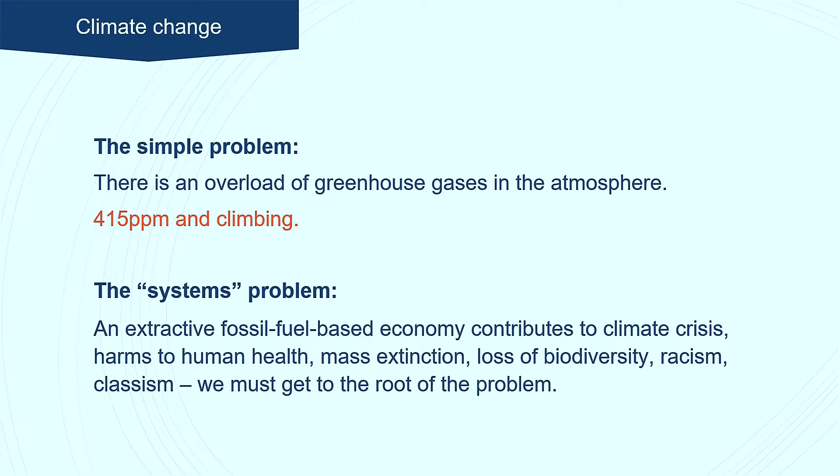An extractive fossil fuel economy is a root cause to a host of different sufferings across our planet, from human health impacts, mass extinction, biodiversity loss, racism and classism, and also a host of different social inequities. We need to get to the root of the problem to be able to develop the sustainable future that we're actually trying to create, and identifying that an imbalance in atmospheric chemistry is part of what's pushing us forward towards action.

So when we think about this on the buildings level, try to bring it to what everybody in this room is really good at, the simple solution is that the carbon emissions from the buildings that we all design, make, work on, renovate need to come down, and they need to come down sort of at the rate that the IPCC is saying is necessary to avoid the worst of climate change.

But the system solution means that the simplest steps we can take, and we're definitely going to show you a whole bunch of simple steps that are really impactful, but the simple steps like material substitutions aren't going to get us that whole way. They're not going to fix the system. They're going to be a small part of the solution, but we have to think about, as Ace was saying, how what we're doing in our sphere connects to all of these other spheres.

How does it connect to forestry? How does it connect to agriculture? How does it connect to affordable housing? All of these other issues. That becomes part of our domain if we're working on this. So just to start off, we're going to do a teeny bit of earth science and understand exactly what we're speaking about. Because like we were saying, in order to get to how our solutions are going to be effective, we have to understand the systemic problem.

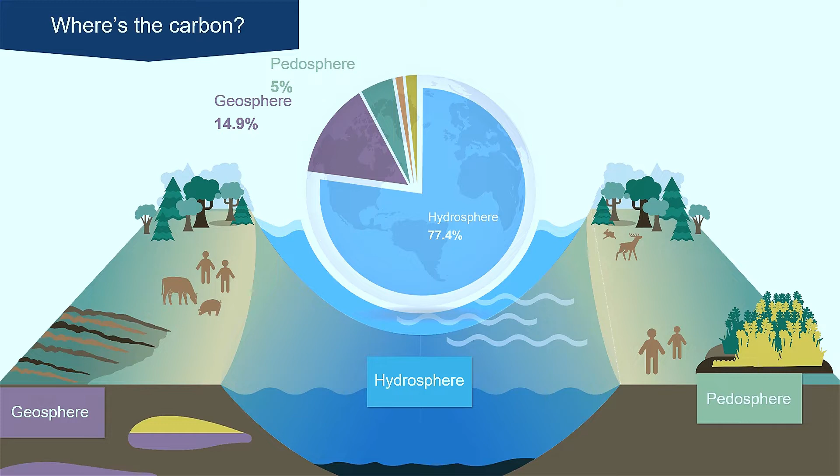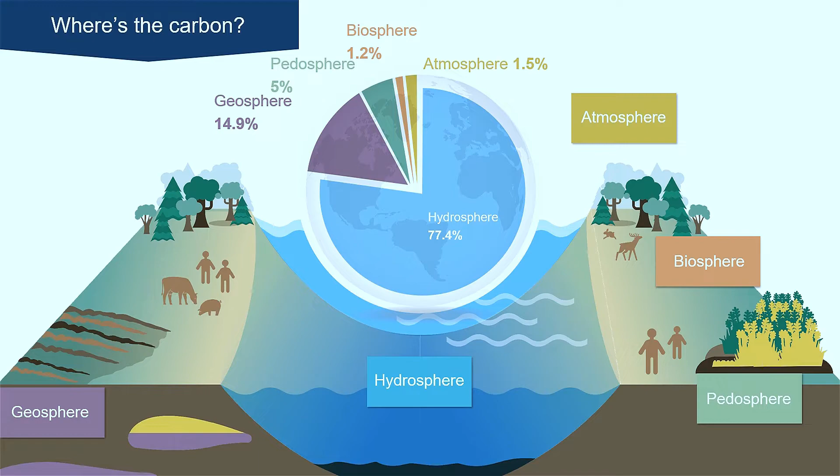And then we've got the geologic, down here, the geosphere, and that's rocks, basically, and the lithosphere, anything below the soil. And then we have the pedosphere on the right, that's the soil that represents the exchange between the rocks underneath and the atmosphere, the biosphere of living creatures, and the water as well. So the biosphere just popped up there. The percentages there are the percentages that exist globally of those spaces, and the carbon moves in and out in different forms between all of those.

So that's critical for us to understand, and really briefly, Jacob mentioned greenhouse gases, and the parts per million is an issue for climate change. The planet Venus, many people may be familiar. It's a planet in our solar system. Venus is a lot hotter than Mercury, which is one planet closer to the sun, and there is a key reason for that, and that is that Venus has an incredible concentration of carbon dioxide in its atmosphere, which creates a very intense greenhouse gas effect.

So because all of the carbon in that planetary system is in the atmosphere, it is very heated; you cannot exist on the surface of the planet. So our planet is habitable because we have a carbon balance. That is the key point that we should all understand. So the fact that the carbon system is out of balance, which is currently what is happening with climate change, is why we're in trouble and why we need to change course.

So you can see here we've got emissions due to human activity. I just want to be clear, carbon is always moving into the atmosphere. The fact that it's moving into the atmosphere is not a problem, but the fact that it's moving more than it should, out of balance, by human activity is the point that we need to pay attention to.

So we've got land use changes, which is a huge thing. It affects soil and allows carbon to move from soil storage into the atmosphere. And then we've got the pulling up of fossil carbon and fossil fuels and burning them. Those two activities that we've been doing are outbalancing the system, putting way too much carbon dioxide into the atmosphere, and all of the subsequent problems that we are seeing with that.

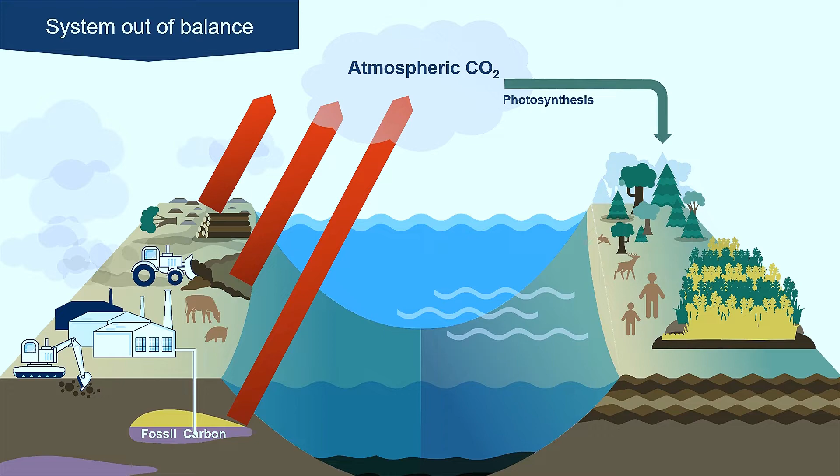So I guess actually I'm going to back up just one second. On the prior slide, here on the right, you can see the photosynthesis line coming down to the plants here. So this is super key. Everyone again, photosynthesis, hopefully grade school at some point. And as a reminder, what we're doing with photosynthesis, plants take sun energy, water, and atmospheric carbon, and they make glucose and oxygen, two things that we really want, food and oxygen.

So in that process, they are storing carbon into the bodies of the plants themselves. So you can see here the plant shoots represent about 30 to 50% of the carbon content that the plant stores. And the plant roots, which you can see beneath the soil, generate about 1 to 3 times that through an interaction with fungus in the soil and create soil storage carbon or soil organic matter, which is where carbon lives in the soil.

So this is critical for us to understand because this is a part of what ecologists and folks understand as the short carbon cycle. So there are 2 carbon cycles. One works with the lithosphere, I love saying that word, lithosphere, rocks in the geosphere, and that takes eons, 100 million years. The short carbon cycle is something we can affect directly, us in partnership with plants. And so that's what we're going to be talking about today.

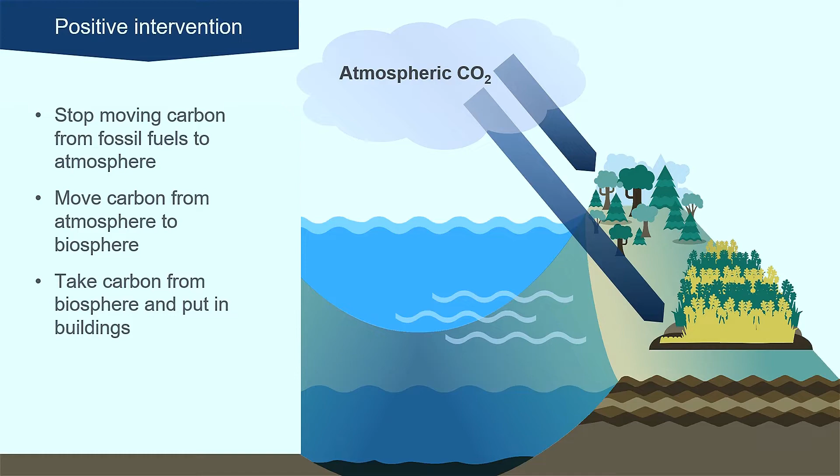And we have to move the carbon that is in the atmosphere back into the biosphere. So we are going to take atmospheric carbon with the use of plants, partner with them in respect, and put them into our buildings to create buildings as the 6th carbon sink. That is something that we as humans can do.

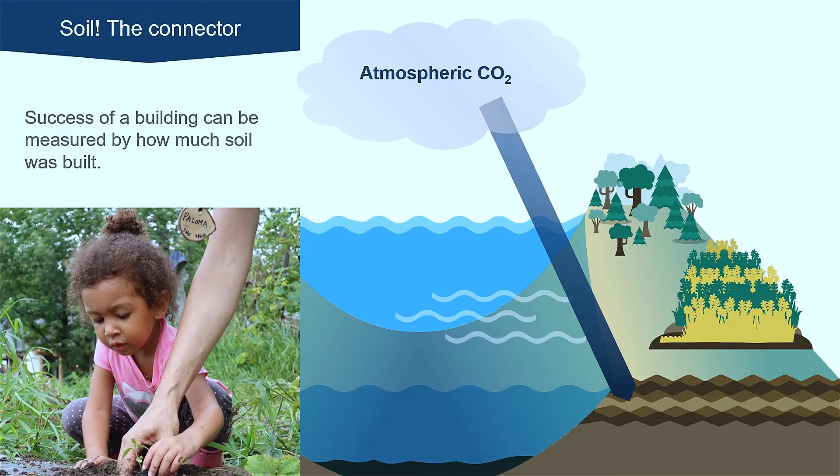So we're going to speak for a second about soil because it's actually really huge. Soil is a connector that, as I mentioned before, connects the geosphere with the biosphere. It's kind of the transition zone between those two things. So it is a mixture of inorganic and organic compounds that store quite a bit of carbon for us globally.

So the key piece that we need to understand is that when we are using carbon storing materials, plant-based materials in our buildings, if we do not pay attention to the way in which that is done, we will actually create more problems. So for us, we'd like to charge everyone here that the success of a building can be measured by how much soil was built in the process of those resources that were used for the building being created.

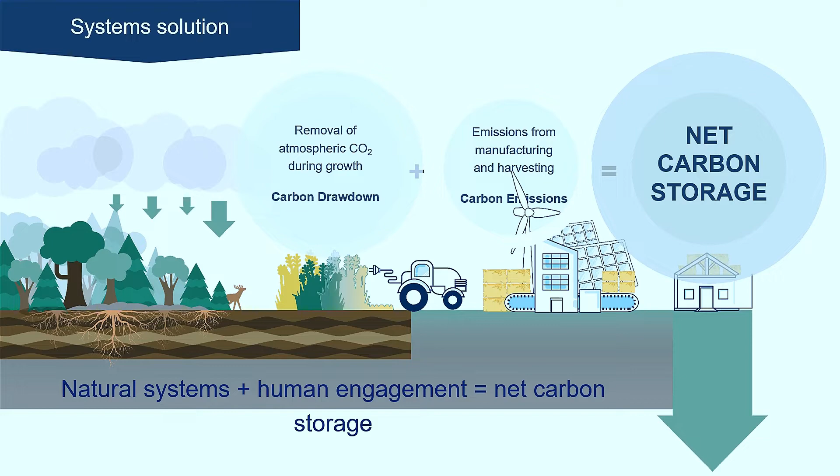We've got solar panels providing energy to that factory, and can anybody see the plug popping out the back of that tractor? So we're looking at changing on multiple scales the way that we practice harvesting materials from the earth that we depend on, building buildings. If we pay attention to how that's done at every level, we magnify, we catapult, we radically multiply the benefits of our action.

So the last thing that I want to say on this is I would encourage everyone to get this book if you have not yet read it. It's Farming While Black by Leah Penniman. She is a farmer in New York State and runs a project called Soul Fire Farm. And Leah has a really great quote that I think is worth us considering.

She says, "Organic matter in soils on the plains plummeted by 50% in just one generation of white settler colonialism. I realized that all of our efforts to heal the soil entailed the restoration of organic matter and was, in effect, a decolonization of the soil. We were inviting our non-human relations back onto the land and back into relationship with us."

So for us, what this really points to is when we think about what does colonize mean? Colonize means that a force, an action, a group of people says, I'm going to go and seize this piece of land or this group of people or this resource, and I'm going to do whatever I want with it, regardless of what was there before, what it is, what its nature is, any of it.

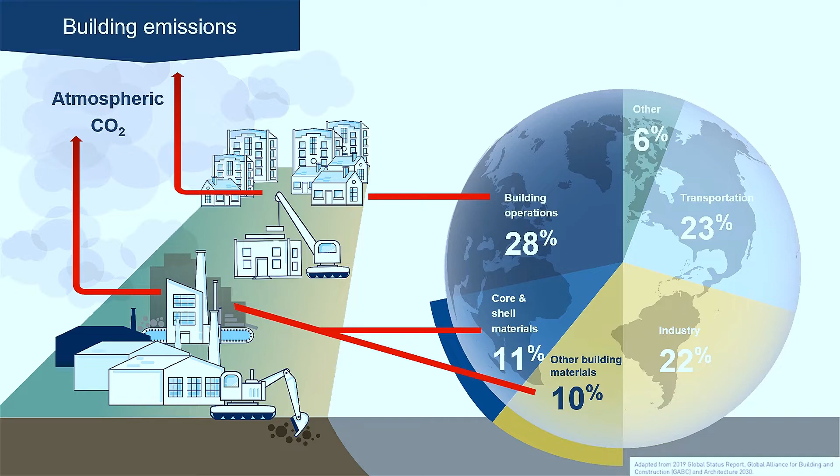But we also see there's an additional 21% of global emissions as a result of creating all the materials that it takes to make these buildings happen in the first place. And where we are right now with the chemical imbalance in the atmosphere and the scale of impact of our industry is that we cannot ignore those two pie wedges. That 21% has to be part of the place of intervention that we take as an industry to minimize our impact. So let's look at the life cycle of a building here.

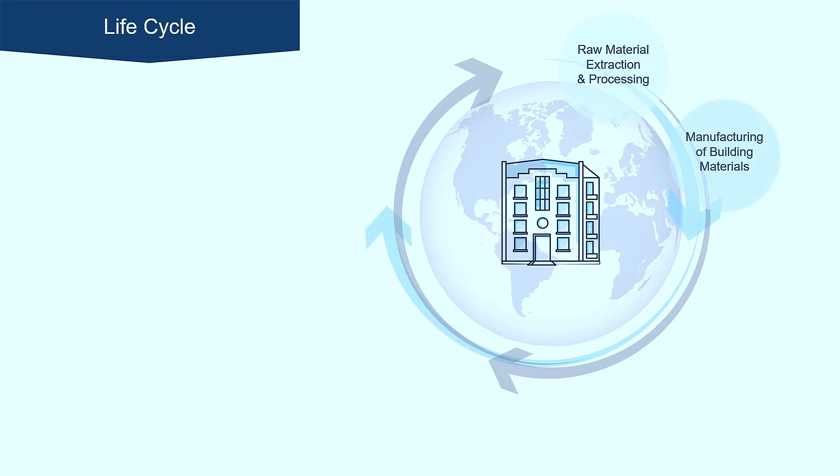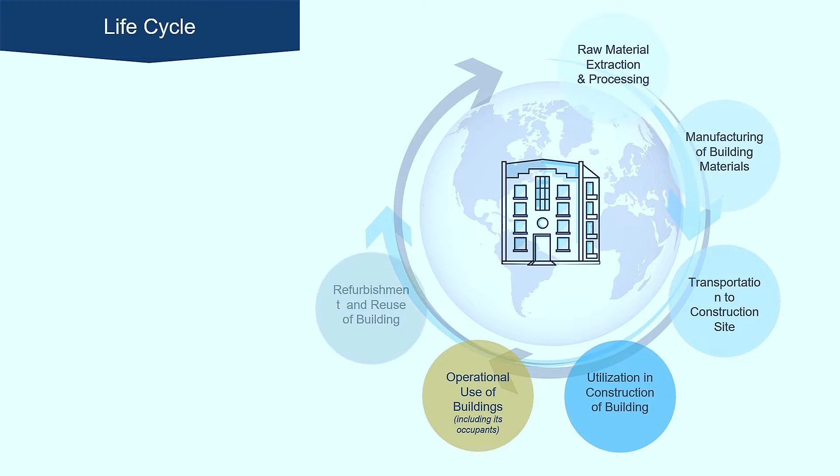We're starting with raw material extraction and processing, goes through manufacturing. All those materials get onto a site. They get constructed in the whole process of construction of creating that building. And then there's the operational phase. That's the one we've been paying a whole lot of attention to. There's maintenance and repair, the demolition of the building, and then recycling or disposal of all those materials.

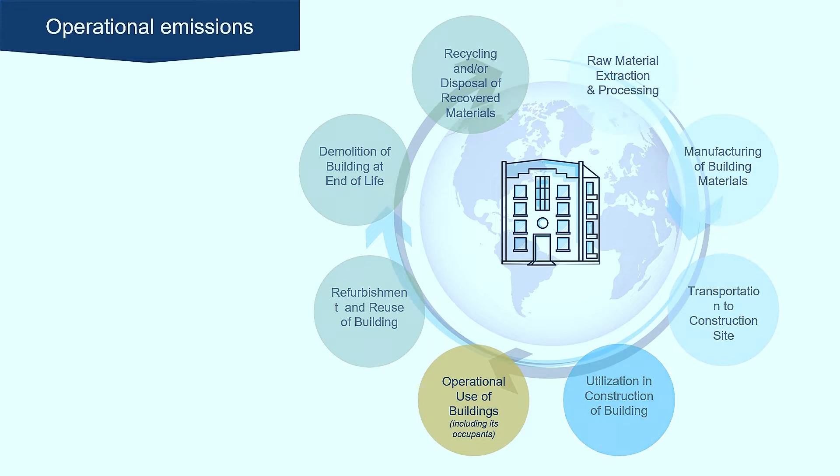So there's an entire life cycle our buildings go through, and there are emissions that occur at every single stage of that cycle. So the majority of our focus as an industry up until this point has been on the operational use. And that is critical because it is the biggest wedge of the pie.

So fundamental that we have been paying attention to that, and give tremendous credit to everyone in this room and this entire community of Efficiency Vermont specifically, and the broader movement of better building energy efficiency practitioners. We can take a tremendous amount of pride in the efforts that we have done up to this point in reducing this largest and most critical impact category. And so we need to keep that effort strong.

In no part of our message in broadening our scope and our focus on other points of impact do we in any way mean to diminish the impact of that work or the critical nature to amplify and increase the amount of operational emissions that we are reducing in our practice. And also, we need to broaden our view beyond simply the operational phase of the whole building life cycle.

And so we've been speaking for a very long time around energy, and when we're referring to a lot of our goals and targets and language around the efforts, it's around energy efficiency and energy reduction. But the atmosphere is less interested in how much energy we're using and more interested in the carbon emissions as a result of that energy production. So to get a really good understanding of what the true climate impact is of our building's operational energy use is to not just look at the energy consumption, but the associated carbon emissions.

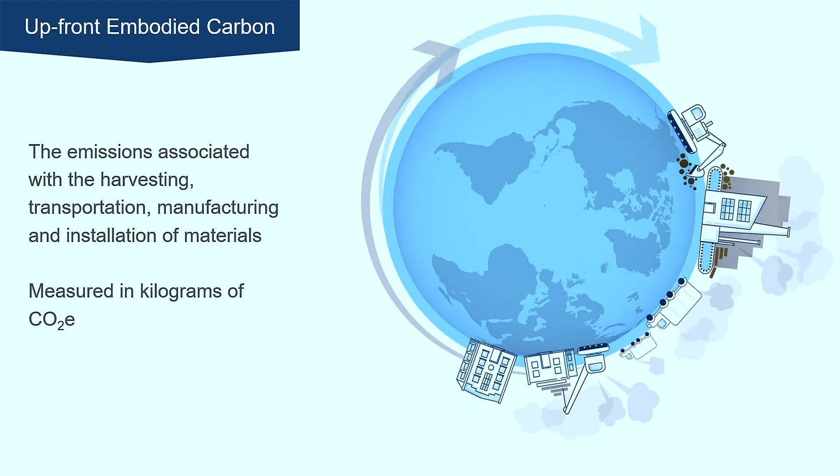When we talk about upfront emissions, we're looking at that category of the life cycle that's happening before the building is even in operation, before day one of occupation. And that whole bank of emissions in those first parts of the cycle are the upfront emissions. And so we can see there's a tremendous amount of impact that comes in each one of those phases. And just to make sure our definitions are clear, that upfront embodied carbon is what we're talking about when we're looking at the material impacts of our buildings.

And the reason we're focusing so specifically on that part of the life cycle is because we have very, very little time to reduce the emissions of our industry. We have multiple generations ahead of us, if we play our cards right and make the changes that we need to, and those end-of-life cycle emissions also count. But the point of intervention is right now. And so the first part of that life cycle is the most critical place of intervention when we consider the short, very narrow window of time we have to make meaningful reductions.

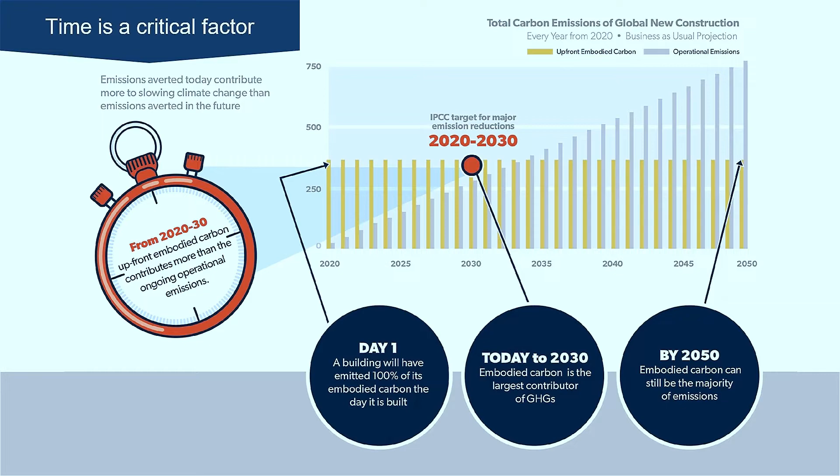So looking at this graph here, just to explain what's happening here. There we go. So day zero, we have a whole whack of carbon emissions that has been invested into the creation of that building. And then every year, we have an incremental addition of operational carbon emissions. And by a certain point, the carbon emissions that come from the operational use of the building outpace the initial investment of emissions that we used in the production of those materials and the construction of that building. But we are starting into the lifespan of that building with an incredible carbon debt if we're not paying attention to the impact of those materials.

So there is not a way to net zero energy our way out of that problem when we have already invested decades worth of operational emissions just in the construction of the building. So if we're truly trying to get to a goal of net zero carbon by 2050, we cannot do that through energy efficiency measures alone. They are critical. We have to keep that bar high, but we cannot ignore all those upfront emissions that we have invested into the building before the building is even occupied.

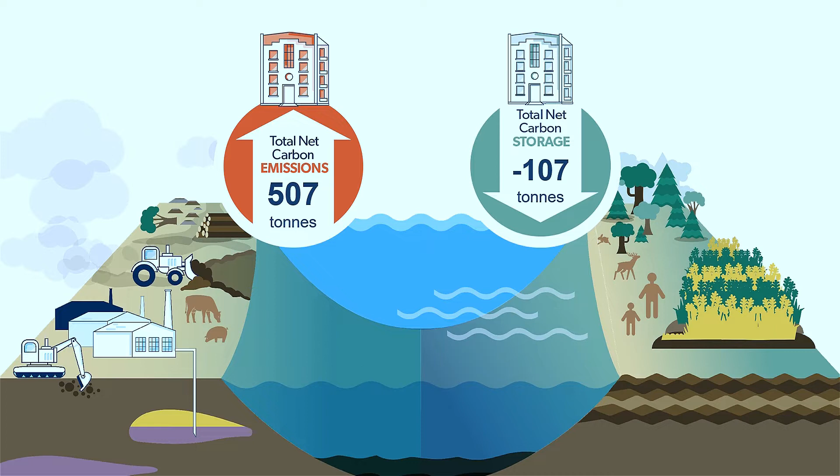And so linking that back into the context of the full global carbon cycle, we can see that the potential of our buildings in business as usual practices will continue this cycle of imbalance if we're not attending to the impacts of the materiality and the construction practices of our industry. But if we can intentionally intervene in that cycle and encourage carbon drawdown cycles that exist within our natural ecosystems, then we have the potential to reverse that impact.

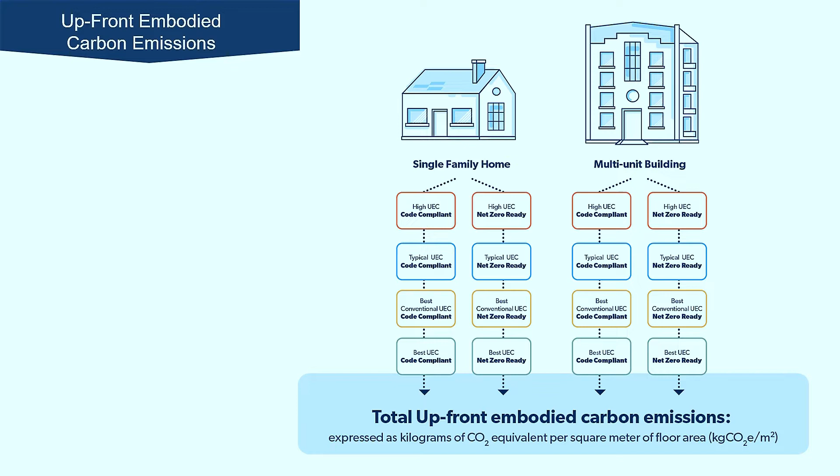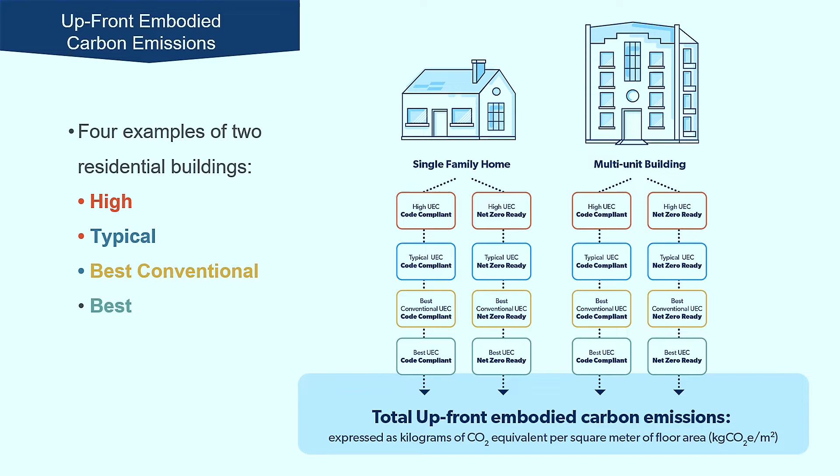Okay. This is the part of the talk that we called last night the nerdy graph slides. Nerdy graph part. Yeah. So this is where we'll dig into what does this look like at the building level. And so this is based on a study I did over the last couple of years where I took a sample single-family home and a sample multi-unit building, and I found data on all the materials you could possibly use to build that building, and I clumped those materials into ones that had really high upfront embodied carbon, mid-range, or I called typical, the absolute best things that you could go get off the shelf today, and then the absolute best practice that we could find anywhere, and tallied up what the emissions were for those buildings in all those scenarios.

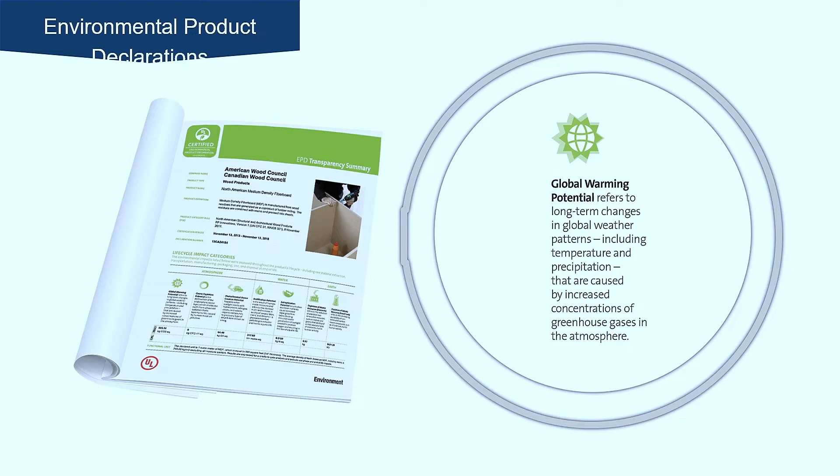All of this data comes from these documents called environmental product declarations. This is something that more and more companies are doing. Couldn't have done this study 5 years ago because there weren't enough of these around, but now there's enough of them that it gives us a really good baseline. I could look at examples of these for all the materials that we would normally use. And so all of these are third-party verified studies that companies commission, and one of the data points that comes out of them is the global warming potential of the materials, and that's what we've used in this study.

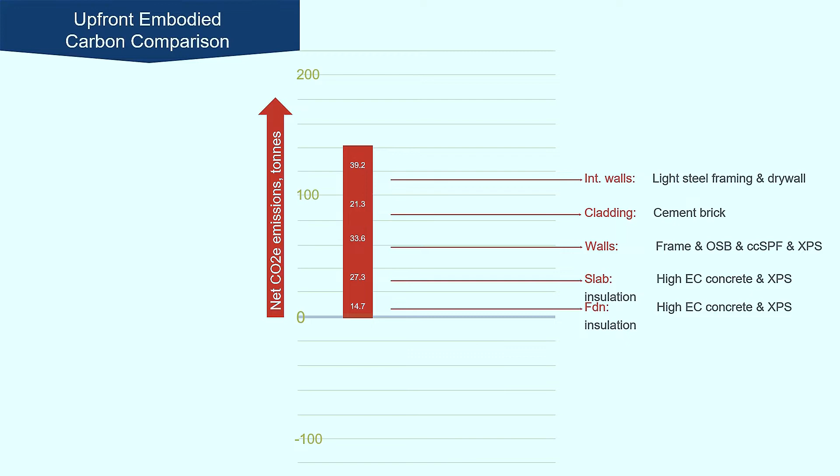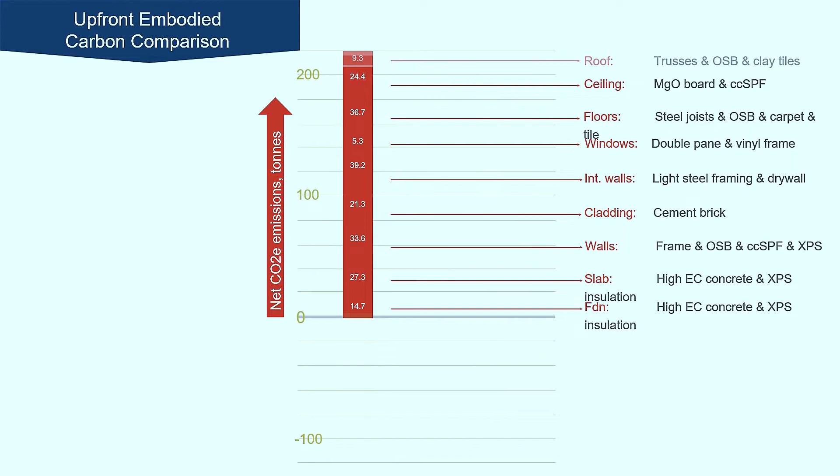So what I'm going to do, and I'm not going to linger and talk about each of the assemblies and materials, you can read them as they go up, but what I want to do is give you the sense that I basically figured out how much of each of these materials was in this building, and I multiplied it by the global warming potential factor and added it all up. This is the larger building, the multi-unit building, so it's 10,000 square feet, 4-story, 8-unit apartment building. And basically it's built in this version to, I'm from Ontario, so to the Ontario Building Code minimum standards for energy efficiency.

So if I chose materials from the higher end of the spectrum, that building has over 200 tonnes of emissions associated just with making the building in the first place. So that's the carbon debt that Jacob was talking about. So whether I make this building super energy efficient or net zero, no matter what I do, this building has a 200 plus ton carbon debt that it's caused on the planet before anybody moves in.

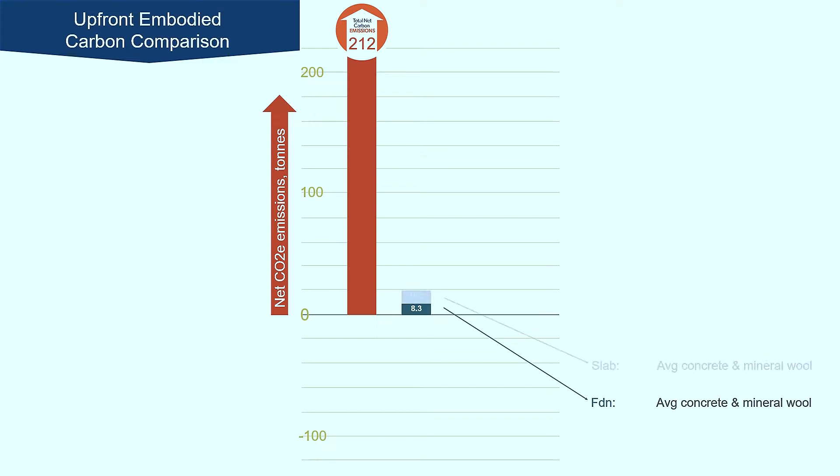So then I subbed out that first round of materials for more typical materials. These are all pretty much straight substitutions. Both of these examples, you will recognize all these materials. We all use them. So without taking any huge steps, without making any big change to the practice at all, that same building can now come down to 68 tons of upfront carbon emissions. Super big impact, super minimal effort or steps needed on our behalf to make that difference. And that's a huge step, to be able to affect that much change simply through some material substitution.

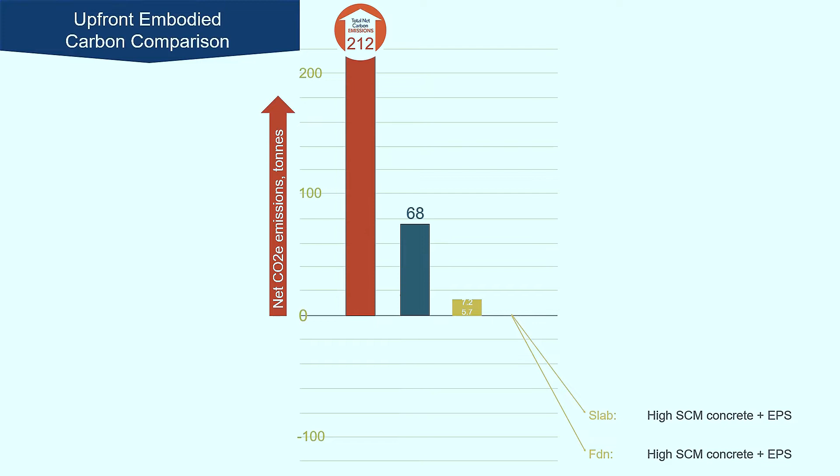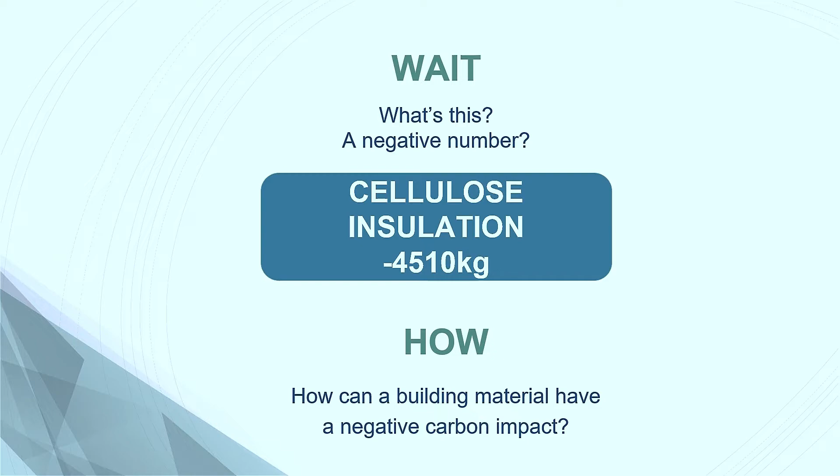So the next model I did, I thought, well, what if I really was being intentional about this, and I am a builder, so I care about this, and I want to do this with the things that I can go get locally that are code compliant. I don't want to veer off into alternatives or anything. What could I do? What would be best practice? And so this one starts to go up, and then all of a sudden I run into, in this whole study, my first negative number. And so now we're talking about the carbon storage, the carbon drawdown that we were first referring to in the opening of the presentation. And Ace will tell you what that's all about.

Awesome. Yeah, so as Chris said, I think you had a moment of just being like, wait, what? Did I do the math wrong? Why is there a minus here? Right. Yeah. So again, like we were talking about, as builders, and as a builder doing your own research, you were leveraging this plant-based storage as an insulation material to help the total impact of your building.

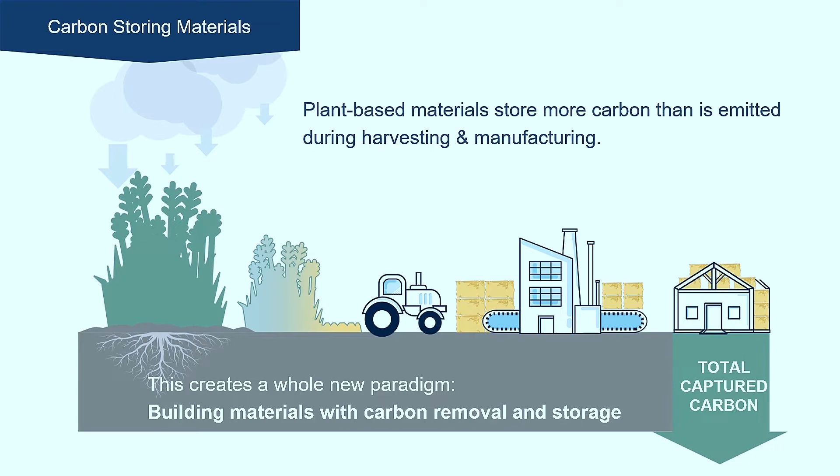Right, so then, like we were showing before, that little equation of natural systems plus our activity equaling captured carbon. So really this is kind of the nexus of what we want to explore with you today: creating this whole new paradigm of building materials that actually remove and then store that carbon in the building. So as long as those materials do not rot or burn, we're good. And I think most of us here have worked for a long time on how to not have our buildings rot. So hopefully we're good on that one.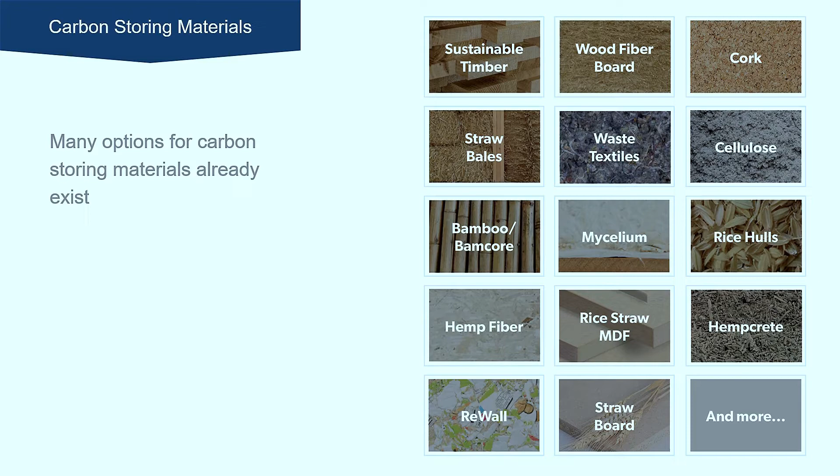Great. And so then, many options exist for this. I know it might seem like, come on, are you guys trying to sell us on some crazy technology that isn't yet accepted by code or isn't practical to achieve or buy? And the fact is that some of these are actually very achievable and accessible, as Chris was mentioning. Cellulose is a great example. I think many of us in this room have used cellulose in either dense pack or loose fill forms in multiple places in our assemblies.

And another very accessible one is wood, which can be complicated because, as we were talking about in the introduction, the way in which the wood is harvested is actually very critical to whether or not it has a good net storage at the end. So there are complications there, but sustainable timber is a really great resource for storage that we can all support. Especially here in Vermont, we have a lot of sustainably managed woodlots that many of our rural foresters and sawyers are managing, and that's something that our company takes a lot of advantage of, using local wood wherever we can.

And then wood fiberboard is another one that has really, in the last few years, catapulted in terms of visibility. So I recommend that everybody check that out. It can be a really good swap, one-for-one, for rigid foam in multiple locations in the building. So those are some that right now you could all take a look and find. Some of these other ones are more medium.

The three of us have had a long history in straw bale construction. So there are plenty of new innovations happening with straw bale that are really worth looking at. Our company built a panelized wall system out of straw bales for a project recently. That's something that's been happening in Europe a lot, and I can see North America really starting to get into it for solutions for multi-unit and single unit buildings. And then some of these are a bit more R&D, but I really encourage everyone to pay attention to these developments, because there's a lot of exciting innovation happening around carbon storing materials in buildings. So I think we're going to see a lot more as we move forward.

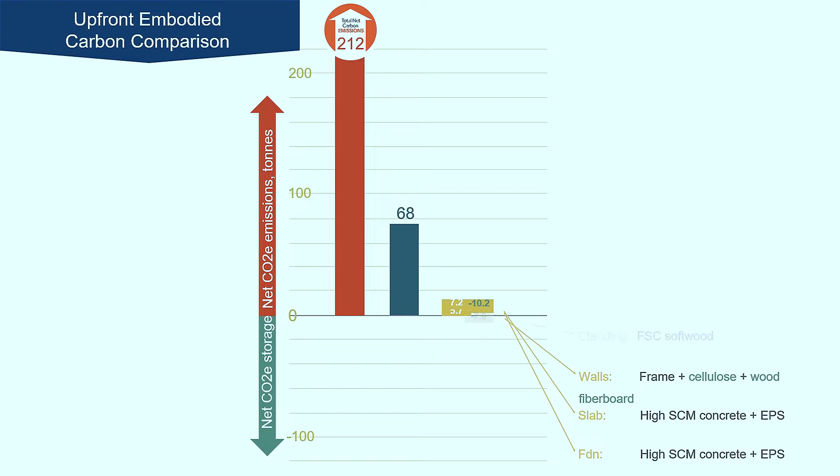Okay, so we'll continue the narrative of this yellow type building that has its first negative number. That's from the wall assembly that has dense packed cellulose as the cavity insulation and wood fiberboard as an exterior insulation. Now we've got some FSC certified cladding that drives the number down further. We've got some FSC wood on the interior walls. The windows drive it up a little bit. So you can see it's going to go up and down depending on the materials. But the amazing part is this building comes out to be a net storer of carbon.

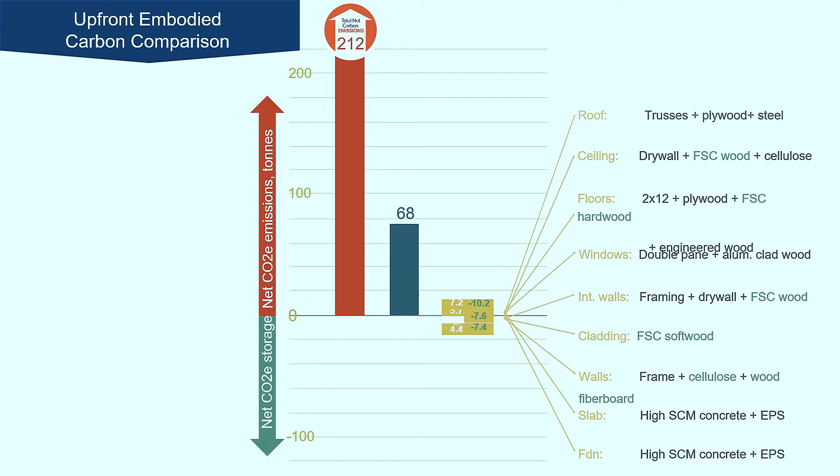So with very little in the way of deviating from our typical practices, from our norms, we can go from making a building that has a couple hundred tons of emissions associated with it to one that's actually below the zero line, that's actually starting in a place where it has stored more carbon than was emitted in making it.

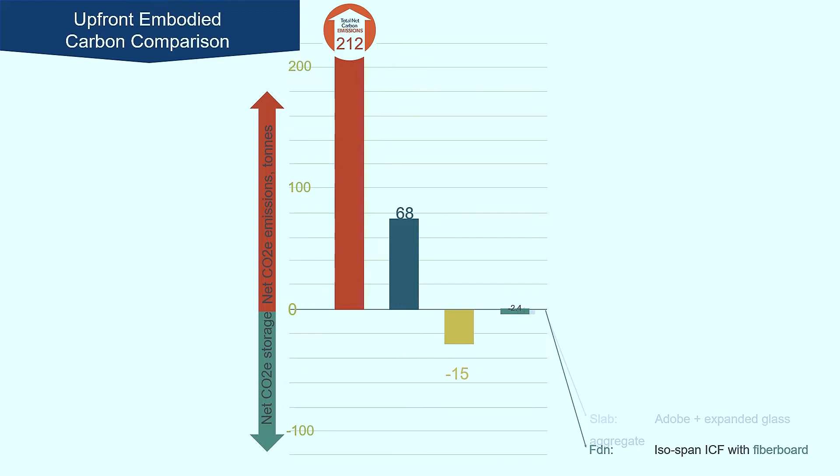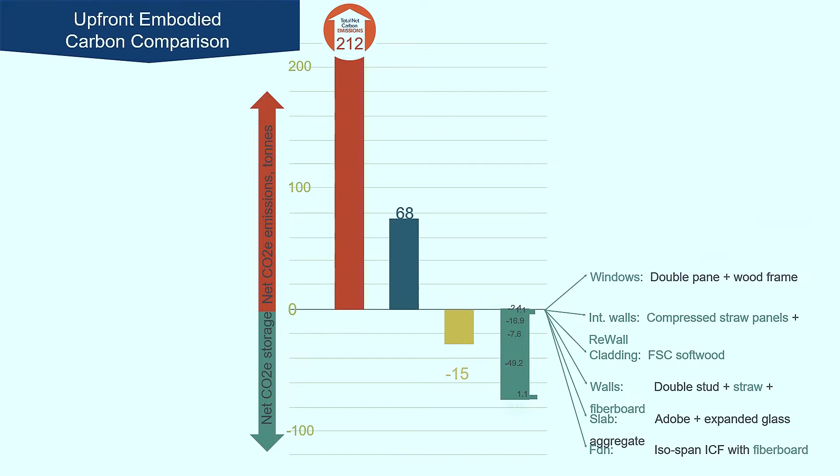And then the final one that I looked at was, well, what if we took the absolute best materials, and it doesn't matter if they're common practice, and it doesn't matter if I can get them at Home Depot, but they're out there and people use them, and they're things that we could feasibly use, and actually in our practice we do use. What if we use the best possible scenario? And you can see most of these numbers are going on the downward slope, and that same building can now store 117 tons of carbon up front.

So now we've almost flipped the paradigm of the first two buildings completely upside down, and we've now got a building that's storing a really quite vast amount of carbon from the get-go. So you're actually drawing down. That's the carbon drawdown we're talking about. That's a drawdown building where there's a significant amount of carbon came out of the atmosphere and is stored in the building.

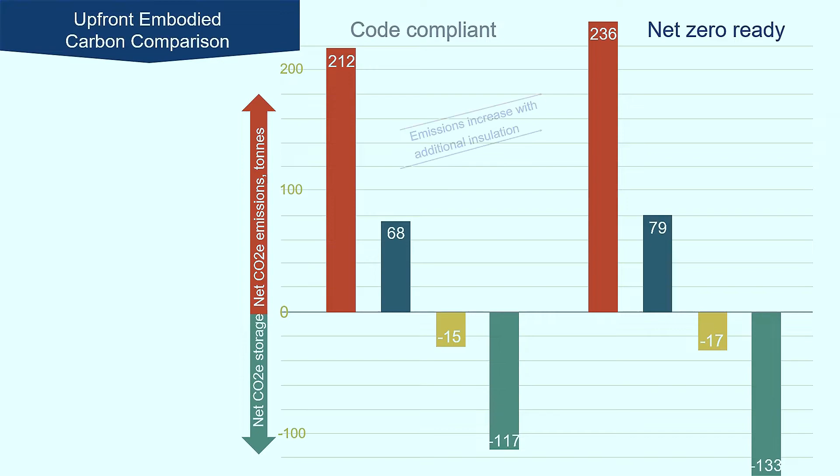So that's if I modeled that building to Ontario Code minimum standards. I also modeled it as though it met our upcoming 2030 net zero codes. And what's interesting here is that in increasing the energy efficiency with the first two models, the red and the blue typology, in order to get some energy efficiency and to try to make an impact on emissions on the operational side, we've actually driven the emissions up by adding insulation that has a carbon footprint. And the exact opposite happens with the other ones.

If you're using carbon storing insulation, by adding more insulation, you're adding more storage. You've kind of started with a win-win. So instead of making this carbon investment and hoping it pays off, you're just doing a better thing from the beginning and then continuing to do the better thing afterwards. So it's not that more insulation or more or less energy efficient is better or worse. It has a lot to do with what materials you use to get there.

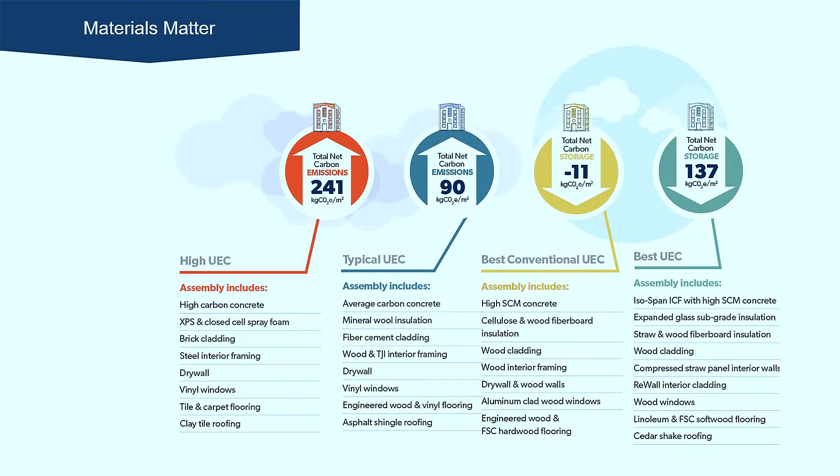And so that's sort of a look at those materials, those assemblies. And here we've changed the numbers over to kilograms of CO2 per square meter of building area so that it's easy to compare between buildings. So the first numbers were totals, and this is what those totals look like expressed over the size of the building. What's interesting, that might look like a number, and you're not sure what that number means.

But if all the buildings that are built in the US in a year at that scale, so from 4-story residential down to one single unit residential, so 240 million square meters a year, if they're all built in that red typology way, that's the equivalent of contributing the emissions of 15 coal-fired power plants a year from making residential buildings in this country. That's a big impact when it's spread out. But on the other side, if we're able to do best practice and really make these buildings carbon storing, first of all, you've eliminated the emissions of those 15 coal plants, and you're storing the equivalent of another 10 coal plants worth of emissions.

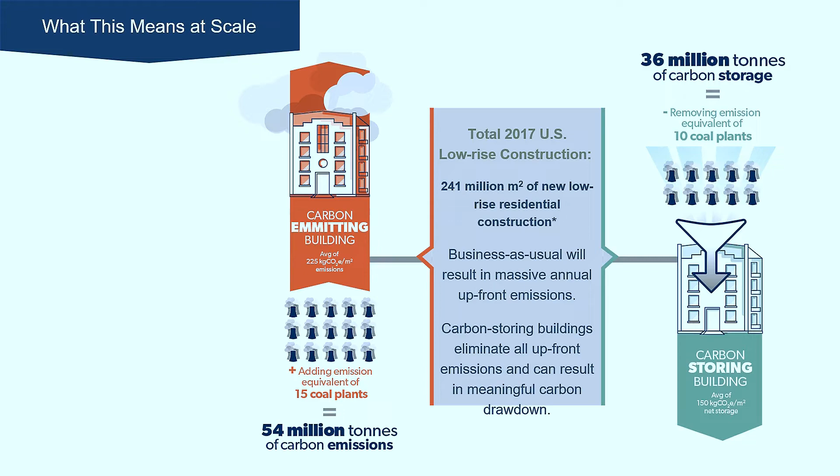So if you're thinking about, oh, I could do this on my building, but does my building really make a difference, and how big a deal could this be? If we can actually get this industry to move from what it looks like on that red bar to what it looks like on the green bar, that will be the single biggest emissions intervention that's happened on the planet. When my province of Ontario shut down our 6 coal plants a few years ago, that was the biggest drop in emissions in North America, and we're talking that the building industry could almost double that on an annual basis. So the potential at scale is really large.

And I think what's really huge about that, Chris, too, is that that's each of us individually in our little projects, and there's something really empowering about that. We're not just talking about big cities that have high-rise buildings with multiple architecture firms collaborating. We're saying all of us in our projects that we do every year, and there's something very democratic and empowering about that I think we all need to really ground in with.

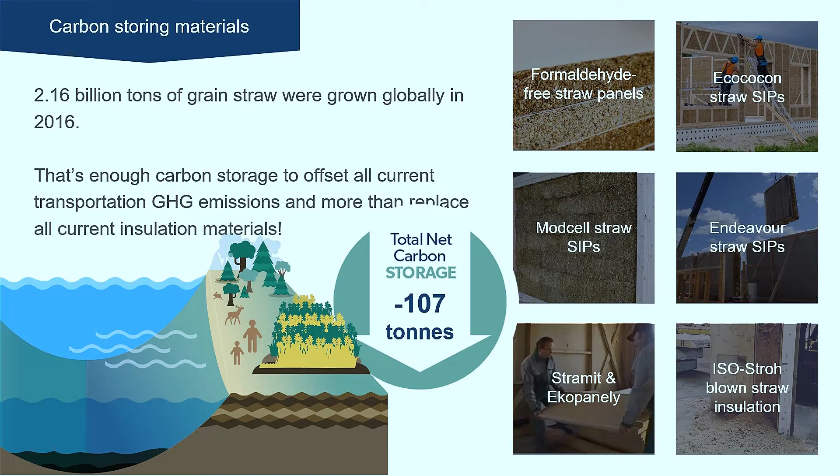Yeah. And so the other question that comes up when we talk about this is, okay, that sounds great, but do we even have enough of these kinds of materials to be able to do this with? And the answer is yes. So just grain straw right now, not looking at all the other biogenic materials that we looked at in those buildings, but just grain straw, over 2 billion tons of that gets grown on the planet every year. We eat the seeds off the top and the stems are left behind. We can use those stems in all kinds of ways in our buildings, and people do. But that amount of grain straw alone is enough to store all the transportation emissions that we produce on the planet. So in other words, that drawdown is already happening.

The farmers plant enough wheat, oats, barley, rice, rye, all of those kinds of things. Those plants grow. They are literally already taking all of our transportation emissions out of the atmosphere and putting them in the plants. And all we're missing is that we typically burn off those stalks or let them rot or in some other way put the carbon back into the atmosphere. If we can just figure out how to get it from the field into a building, then that's a massive amount of potential drawdown.

I want to take a quick minute just to make sure we're really clear on definitions of terms, because I realize we've been throwing around carbon, carbon dioxide, greenhouse gas emissions. So just to get super clear on the definitions, when we were talking about carbon emissions, that's actually a bit of a shorthand language. We really mean carbon dioxide. But carbon dioxide is not the only greenhouse gas that gets emitted through our building practices. Refrigerants, blowing agents, there's a host of other chemicals that have thousands of times the impact of a single molecule of carbon dioxide as a greenhouse gas.

So to be able to make all of those different greenhouse gases equivalent to a common metric, we use carbon dioxide as the common equivalency. So anytime you see CO2e, that's carbon dioxide equivalent, and it's all the greenhouse gases sort of normalized to the value of one molecule of carbon dioxide. And then when we're talking about carbon in terms of carbon storage, that is actually elemental carbon, the C, that's being bound up in the plant. And so again, that photosynthetic process, the oxygen is released, the carbon stays in the plant or goes into the soil. So I just want to be really clear, because we're not always saying carbon dioxide equivalent.

So Chris and I sort of collaborated on this part of his study, in which we then took those buildings and modeled them through dynamic hourly simulation to get an understanding of what the operational carbon emissions are for that single unit building and for that 8-unit building. And we looked at that modeling both under the code compliant, sort of code minimum version, as well as the net zero sort of high performance version. And we looked at that with a few different fuel types, and we actually looked at it under a couple of different grid conditions. So I'm going to spin you really quick. We've looked at the embodied carbon side of things. We want to put that in some context of what does that look like when you factor in the operational carbon as well.

So again, we made a bunch of assumptions around the building and its operation. For those of you that really like drilling into the details, we can talk later. Happy to geek out on that.

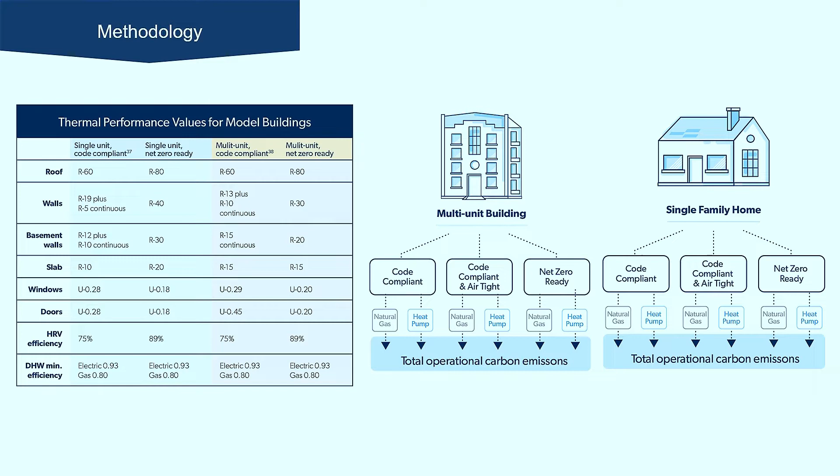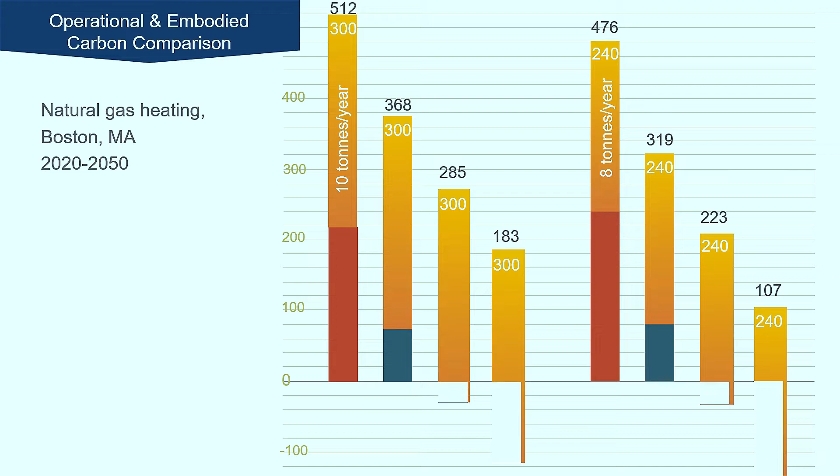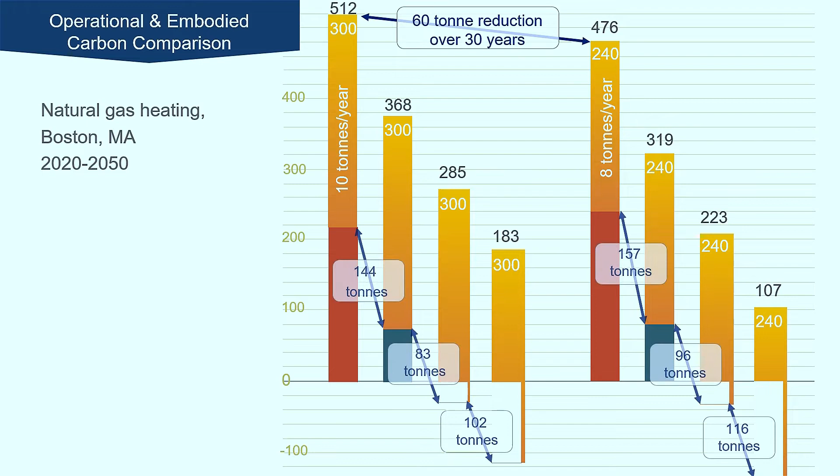So again, we're starting on these 4 buildings. The red is the high emissions profile of materials, down to the green being the superstoring assembly. And on the left, again, we've got the code minimum, and on the right, we've got the high performance version. We're looking at natural gas heating, high performance, high efficiency gas boiler in Boston, Massachusetts. And we looked at the total emissions during the operational phase of that building between now and 2050. And we gated 2050 as the time window of our analysis, because that's the time by which the IPCC says that our industry has to be net zero carbon. So if we haven't hit these goals within the next 30 years, then we have a very different conversation in front of us.

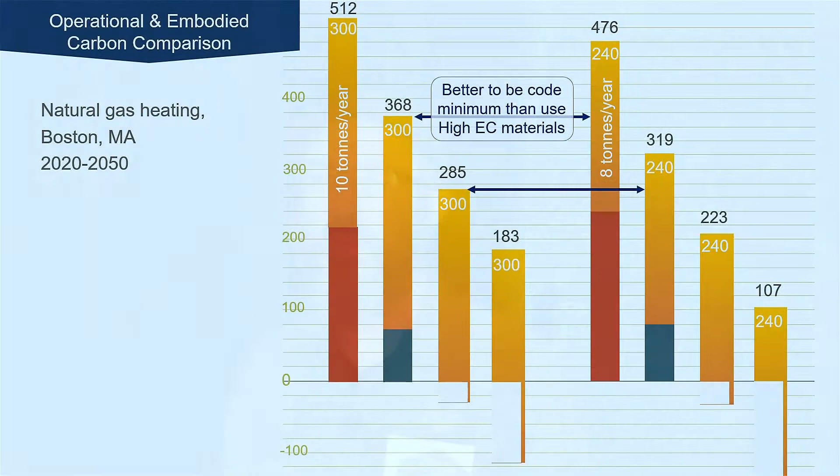So that code minimum building within that 30-year window is emitting about 10 tons per year in operational emissions. And that's a combination of gas heating as well as the electric loads for domestic hot water and lighting and plug loads, et cetera. And so you add that same amount for each of those building enclosure types. We kept the interior square footage fixed, so it's just the enclosure that's changing outside the interior, so no matter how we're building, what materials we're using to build it, the operational energy is kept consistent. And then we looked at that for the high-performance unit and added that 30 years of operational energy for the high-performance version of those same 4 typologies. And this is for the 8-unit building, the big building we're looking at right now. So there's a couple of interesting points to pull out here.

We reduced 60 tons of emissions by moving from the code-compliant to the high-performance version of that building over that 30-year period of time, which is fantastic. What's also notable is that every time we make a step down from a higher emission package of materials to a slightly better, to the best that's easiest, to the most optimal, every one of those steps is significantly larger than the amount of operational savings that was realized in a 30-year window by improving the efficiency of the enclosure.

Now, do not get me wrong. We are not suggesting that we don't need to worry about energy efficiency. We absolutely need to be building the high-performance building shells. That is a critical baseline. But what we're saying is that there are even larger realizations of emissions that we can actualize by attending to the materiality of how we created that high-performance shell. And that can be significantly larger than just the operational savings. Again, when we're not looking at an 80-year lifespan of a building, we have 30 years within which to try to hit these goals that have been set up by the global scientific community.

What's really alarming is how hard the law of unintended consequences can hit us when we're not paying attention. And what was alarming was to find that it is quite plausible to build a high-performance building that is significantly worse for the atmosphere than a code minimum building if we're not paying attention to the impact of the materials that we're using to get there. And that is a very sobering reality for those of us that have been in this industry for a really long time and who have been dedicating our lives and our careers to improving our practice and focusing on this very specific goal of improving the operational performance of our buildings.

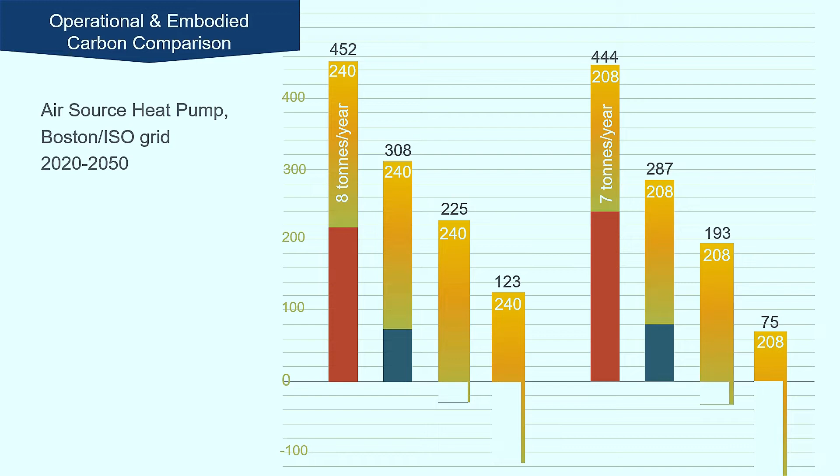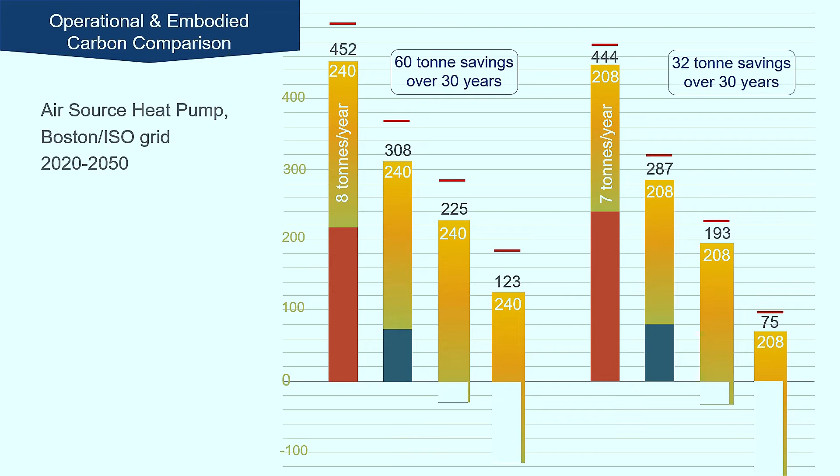It's worth noting that it is not getting to this true net zero environment, even on the high performance side of things, and no small part of that has to do with the carbon intensity of the ISO New England grid. This is where we have to stop just looking at energy as our metric and look at the true carbon impact. If you're only measuring energy on site, there is a whole host of additional emissions and externalities that are not part of that equation. So a net zero energy building does not mean a net zero carbon emission building. When you look at the full span of emissions that come from delivering all of that electricity to the site and the carbon emission profile of a not super clean grid, that's where we start realizing that some of those true carbon savings aren't materializing the way that we might like to see.

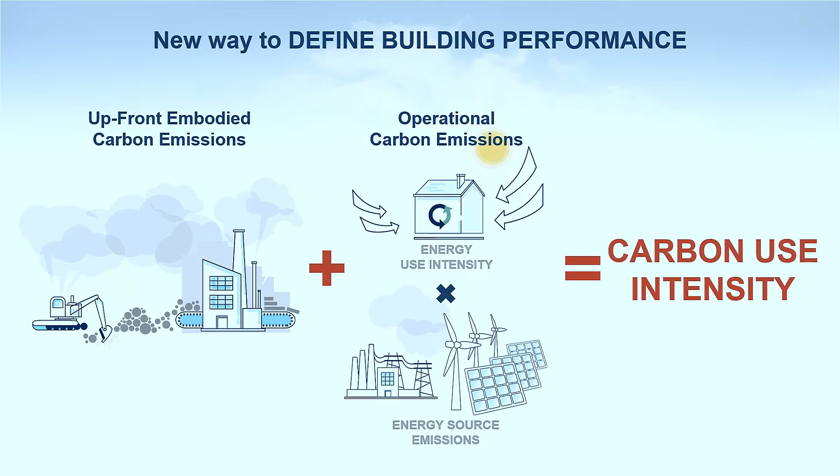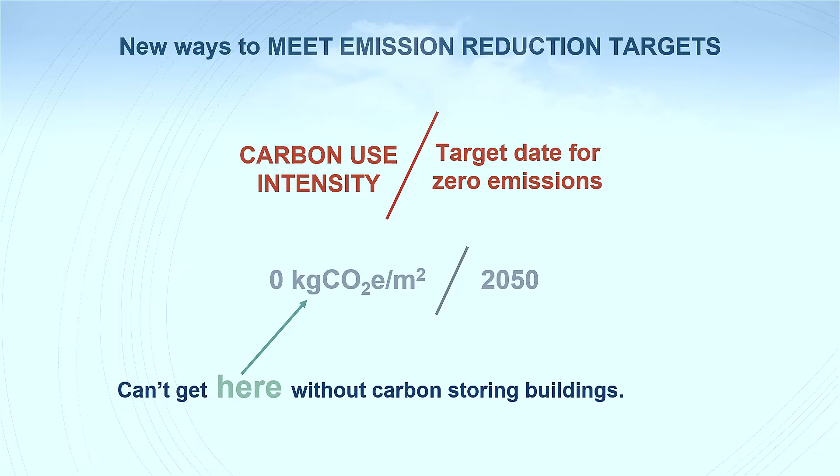And here are some arrows to make sure you really understand what I'm talking about. So what we're really going to ask everyone to do is to take the EUI that many of us are familiar with and upgrade that to CUI, carbon use intensity, including those upfront carbon emissions alongside our operational and the externalities of the building impacts. So this is a big shift that I think our community is completely prepared and capable of doing. We just need everybody to work on this.

So to meet those emission reduction targets, essentially what we're looking at, as Jacob mentioned, is 0 kilograms CO2 equivalent per meter squared by 2050. So if we're going to do that, we need to also include storage. As we've been saying really clearly, we've got to deal with the emissions side of things, super important. We have to keep doing that and get better at it. But we also have to include storage in the equation. Otherwise, we are not going to hit that target. So it's really critical.

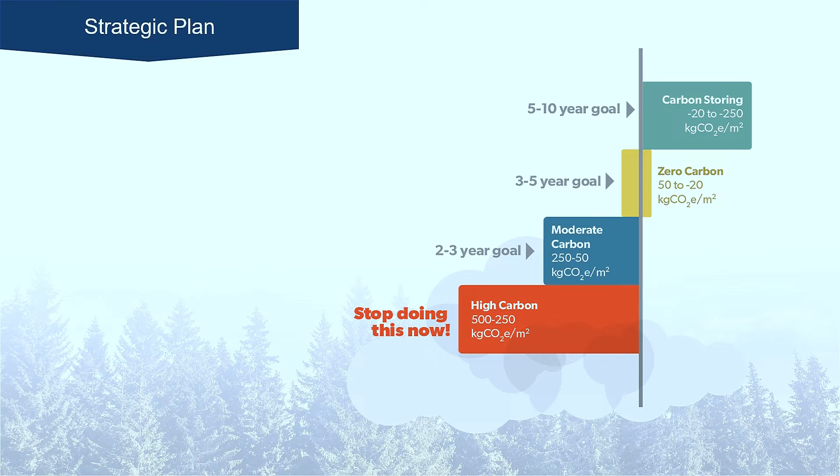And so if that was our vision, this is our strategic plan, because you need both, right? You can't just say, we want to be in this place. We also have to say, how are we going to get there? How is that going to be done? So starting again with the red bar and thinking about that building that Chris presented with all of the particular materials that were a part of that, we have to stop doing that right now. So anyone who's got that on their drawing board, in their plans, in their estimate, I would challenge everyone to see how you can pivot from that place now.

Within 2 to 3 years, I think this community can really make moderate carbon building the norm. So materials that are available right now, Chris mentioned Home Depot, but many of our locally owned building suppliers are a great source as well. So we're talking about those materials that are available that we just have to remember to use and remember to spec instead of those high emitting materials. So that's your local woods, your celluloses, anything plant-based, and moving away from the higher intensity materials.

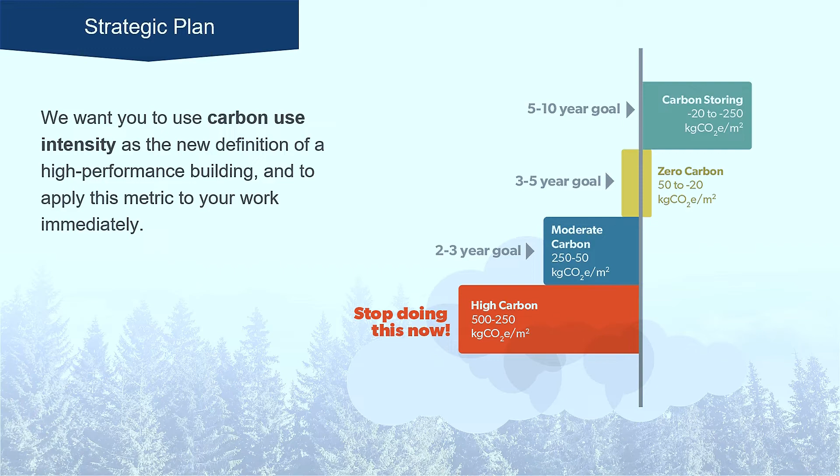The 3 to 5 year goal is getting to zero carbon, so getting even a little bit further with what we're doing with the materials. And then the carbon storing building within 5 to 10 years. So this is a big challenge, right? I know all of you out there who have your practices, your minds are churning. How is this going to work? So we hope to show a couple of case studies and some examples that can point the way forward for how we're going to do this. So again, carbon use intensity is now becoming our collective new definition of what a high performance building is.

All right, so it's challenging to try and think about this whole list of different things and get some sense of prioritization and order, and figure out where we step into the work. And I want to give credit to Donella Meadows, who's a brilliant systems thinker and Vermonter, who came up with this wonderful framework of how to change a system, how to change a paradigm. She has this great paper, Leverage Points: Places to Intervene in a System, and identified a whole series of different points of intervention, from very simple, rudimentary, definitional points of intervention, all the way up to changing the entire paradigm in which the system operates. And those different leverage points will have different impacts on how rapidly a system can move and change. And that's what we're talking about.

We're trying to invite the opportunity for us to redefine and to recreate the paradigm in which construction is achieved in this environment. So riffing off of her identification of how you can identify these leverage points, we want to just use that as a framework.

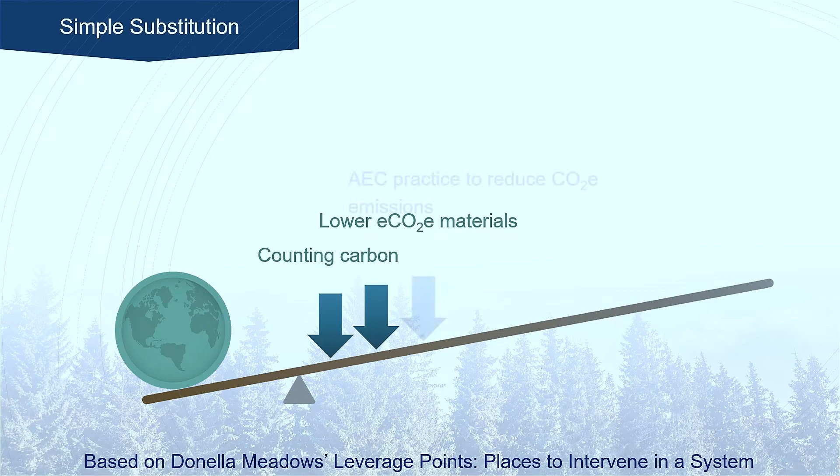Moving up there, we can just start using lower embodied carbon materials on our next projects and just make some of those simple material switches. Then actually changing the architectural, engineering and construction practices to reducing carbon emissions as an overall goal, moving beyond just swapping out a given material to setting some goals around emission reduction.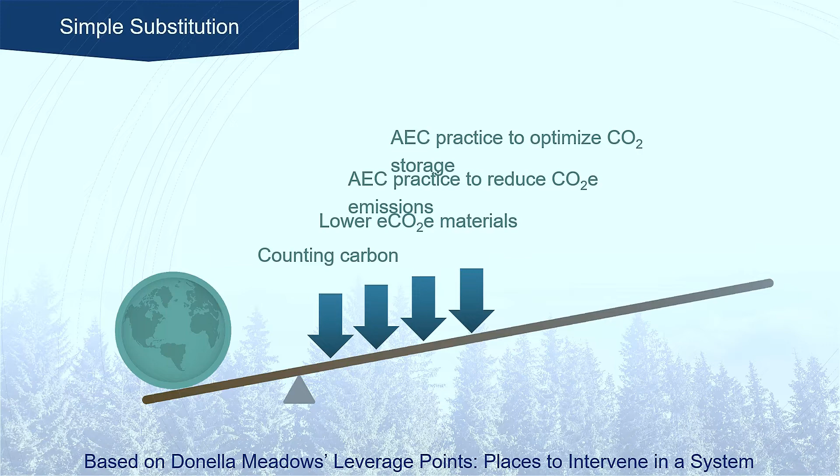And then the next step up for that would be to actually design as if we are optimizing carbon storage. So instead of mitigating the impact, optimizing the potential of how we could design and construct and engineer our buildings to be carbon storage. So those are some of those first steps along the leverage point.

And one of the really interesting things that came out of the study I did was that this very first intervention, the simple substitution of materials, so the global warming potential of those materials was better, but what was really interesting was that on all the other 6 areas that an environmental product declaration looks at, the material with the lowest global warming potential in its category also had the lowest impacts in all of these other categories.

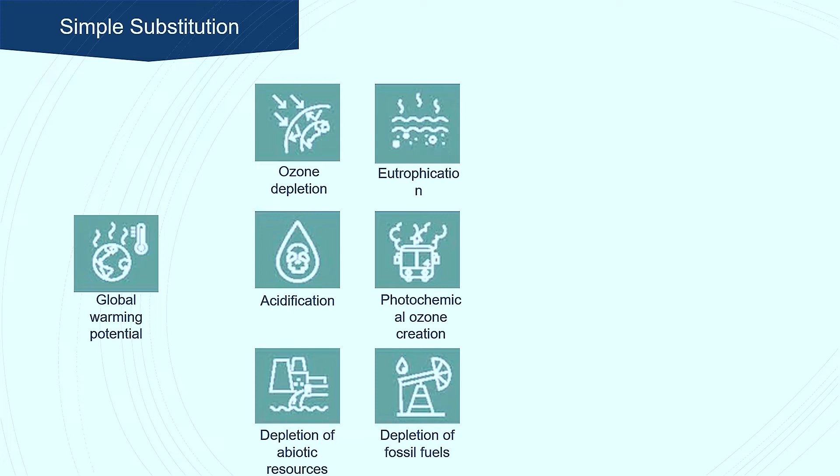So by doing this one good and right thing, I just happened to do the good and right thing in a whole bunch of other areas without having to really know that or have that be motivating me. And the other thing that came out of it is that none of the best materials in their category had any red list chemicals. So I'm going to be making a healthier building for my building occupant

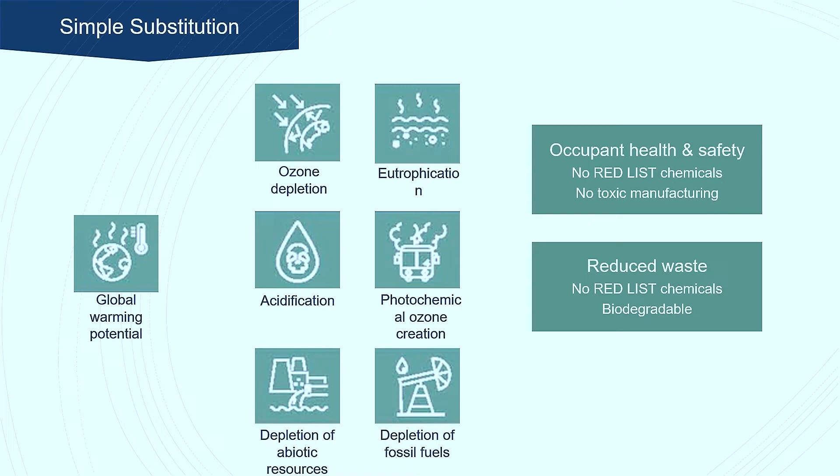by making that climate-friendly choice. And at the end of life, most of those materials are recyclable or biodegradable, and they also don't have the weird chemicals in them, so they also lighten the load at the end of the building's lifespan. So this simple substitution, while it's at the early stages of the leverage of changing the whole system, has a range of really important impacts that it just carries along with it, that are sales points for us to be talking to clients about, and meaningful to people for whom maybe carbon isn't the most meaningful part of their reason for wanting to make a building.

All right, the retrofit world is a really important space to be addressing this. A lot of folks are thinking that we're just talking about new construction, but we're incredibly proud of the work that we've been able to do with New Frameworks in partnership with Efficiency Vermont and the EEN network, doing really wonderful weatherization work. And this is an incredible community of folks committed to retrofitting this very old housing stock in our region.

So we took some projects that we'd run through HERO, the reporting program for the Home Performance with Energy Star program, and just did a look at some projects we'd done with spray foam and with cellulose insulation as bracketing the 2 sides on a given band joist measure. And we found that the jobs that we've done with cellulose start by storing carbon. So this is just a preliminary look at some of this data and what the impacts are of the material choice against the operational savings.

And so retrofit impacts, again, this is also within our company. This was internal research measuring our own impacts of our work, looking at a closed cavity roof insulation condition, a project of 945 square feet brought to R49 here in Burlington. On the left, there's this grouped system where you see the cellulose embodied carbon is the dark blue. The next bar is that operational carbon, and then the net is to the right of that. So that shows the net impact of that measure.

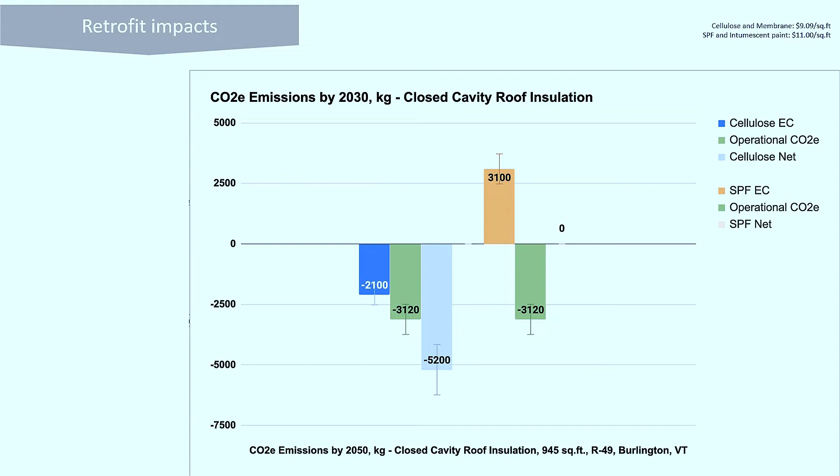And then here's that same exact R value, that same exact condition done with spray polyurethane foam, and where we get with the net. So for us, this was really helpful to be able to look at our own practice and say, does this really matter? And this shows us that it does. It's important to look at. Right. And for a net savings in cost to implement the measure. Yeah, and again, the costs are up there on the right as well, because of the charge of, well, isn't this more expensive, and is this actually possible? For us, this is showing that it really is.

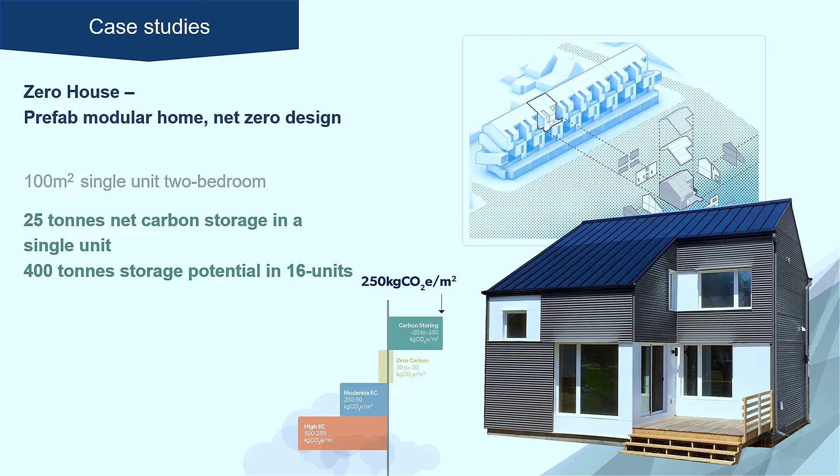All right, case studies, which I'm going to fly through really quickly because we're starting to dwindle on time, but I just wanted to show you that again, this is doable and it is affordable. This is a little house that we did with our school up in Ontario. Fairly small, about 1,100 square feet. But I want to draw your attention to the little bar that says it's storing 250 kilograms of CO2 per meter squared. That's better than double the best case scenario in my study. And this is a real building that we built for the same cost that other people can build buildings for. And as a plant-based building, it doesn't look like a hippie shack.

So what we're saying is pretty critical: not that you have to use all plant-based materials, but enough plant-based materials to offset the other things. If you want metal siding, you can have metal siding. If you need a concrete foundation, you can have a concrete foundation. It's not a 100% plant-based building. It's making sure your plants are offsetting your emitting materials to the degree of the target you've set. In this case, we set a target to store a ton of carbon. You could set it to balance out to 0, or 50 kilograms per meter squared, or whatever the target is. You can build the building you want to build and be smart about choosing a range of materials that'll get you there.

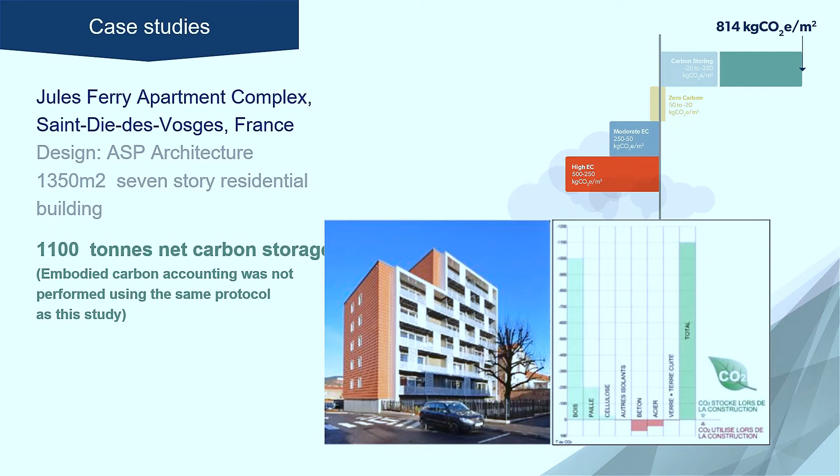And this is a building that isn't anything that I did. This is in France, taking this notion of a carbon storing building to a larger scale. It's a 7-story apartment building built with mass timber and prefab straw bale wall enclosures on the outside. And it's storing about 8 times what the best model in my study showed, 814 kilograms per meter squared. So this is showing that you could scale it both in size and in impact, and that it's doable now. This isn't dreamy, future stuff.

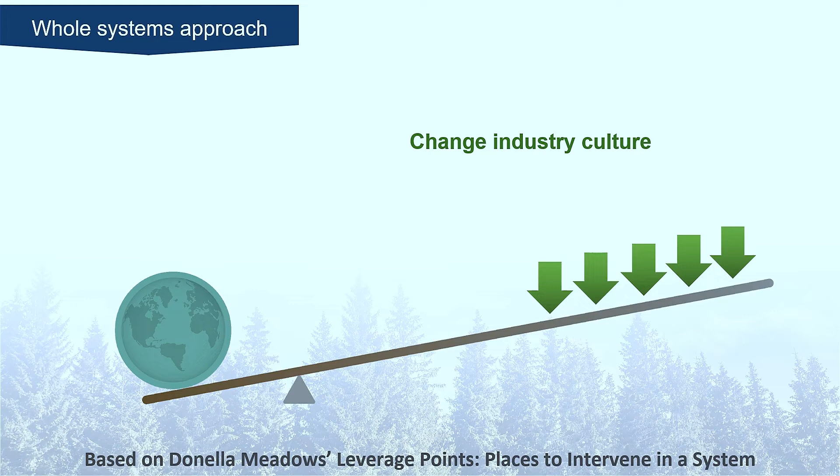All right, so moving towards the end here, we're looking at these larger points of leverage and the real potential for paradigm change when we look at how we can move into our supply chain. It starts with handprinting and broadcasting the successes that we've had, and that's what we're doing right now. I feel incredibly honored to share some of the successes we've realized in our practice and highlight those in others' practices to help inspire what we as an industry can do. Changes in codes and programs and policies. Again, big credit to Efficiency Vermont for taking this seriously and starting to look at this.

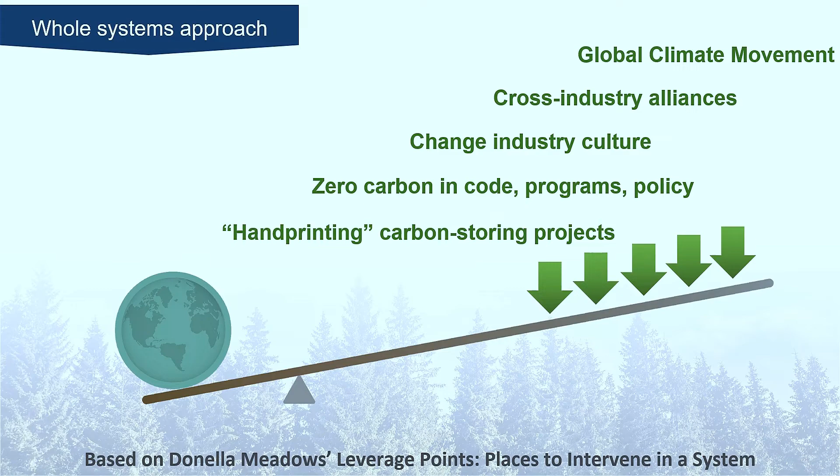And there's a host of other programs and policy developments that can leverage significant change across our industry. Changing the culture of our industry, in all manners necessary to create a holistic change. And then seeing this industry collaborate with our partner industries in manufacturing and agriculture and forestry, et cetera. Once we start getting to those levels of impact, we start recognizing our place within a global climate movement, where across all industries and across all regions, we're able to caretake the ecosystem health of our planet.

And just in case you didn't get it the first time, now they're all there. So we looked at Project Drawdown. If you're not familiar with it, take a look when you've got a few minutes. And we looked at what are the impacts that they've highlighted as the primary points of intervention within the building world, the AEC space. They found about 143 gigatons could be realized by optimizing all of those points of intervention.

But we're talking about looking at our supply chain as well, and the way those materials are created. And we start looking at all the different points of intervention that exist within a biogenic, sustainable supply chain for materials, and we can almost double that impact. And many of those items are way higher up in the impact category than a lot of those building level interventions. And so this just realizes the potential we have when we can start opening our eyes and our arms beyond just the building itself to where those materials come from.

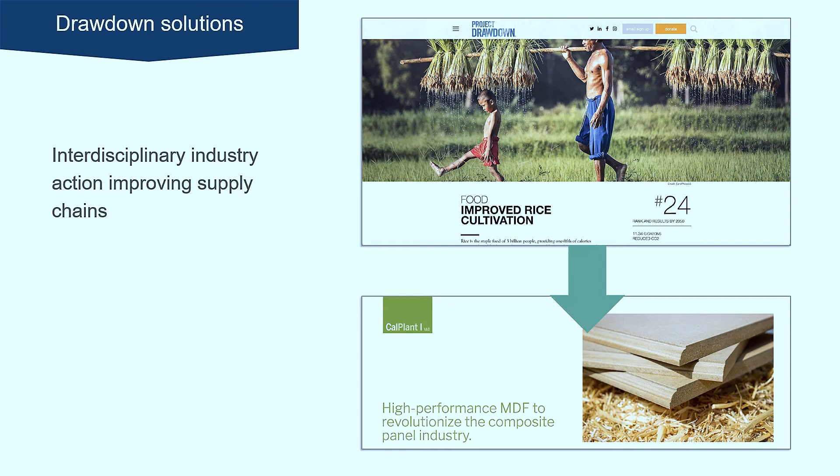And a few really quick case studies around that. Improved rice cultivation, number 24 in the top 100 things we could possibly do to draw down carbon from the planet. The roots of the straw bale building movement back in the 80s came from exactly this relationship, where straw was diverted from being burnt in the fields in California to being put into building insulation across the southwestern United States.

Now there's a new plant that just opened up last month adjacent to a California rice field that is diverting straw that is otherwise being flooded using very precious water resources and anaerobically decomposing to create really high emission methane. That is now being diverted to create straw-based MDF board that can be used in a host of different applications across different products in a building. So this type of inter-industry collaboration is exactly the type of whole systems approach that can leverage significant change when we look beyond just the fact that it's an MDF board.

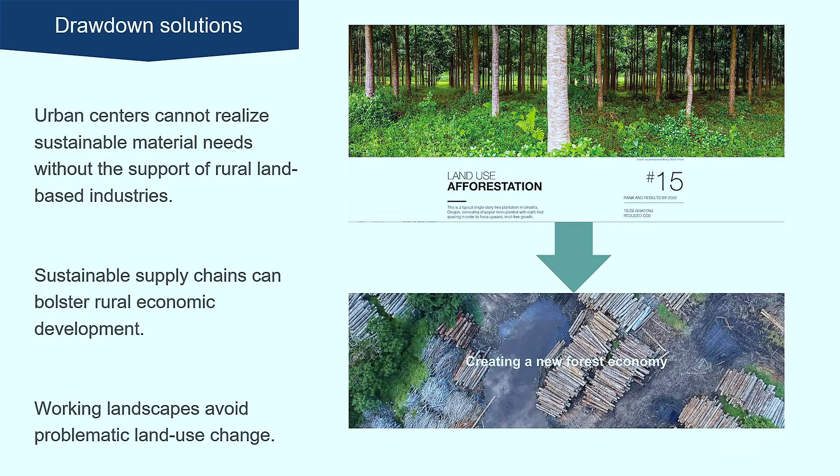And we can bring that right home here in New England, where we have a critical need to be able to invest in our regional wood purveyors. We've seen mills closing regularly over the course of the last decade, and what we lose in that is really significant. The potential of being able to reinvest into our regional land-based economies and industries is critical, not just to create climate responsive and healthy rural economies from a jobs creation and economic development perspective, but urban centers require healthy and vibrant rural economies to create the food and materials that those increasingly urbanized American centers need to function. They're not growing all those trees and all that food within that urban complex.

So we need a harmonization of urban and rural economies to be able to realize these goals for our entire region. And the opportunities that we have within Vermont and within the New England region to optimize the potential of creating a working landscapes model for conservation and avoiding land use transfer and fragmented land management practices is incredible. We have the real opportunity here to integrate those systems to be leaders in our nation around how we can optimize our natural resources, both within our industry and beyond.

Okay. So quickly, codes and policies that are starting to steer in this direction. In case you think the three of us on stage are the only people thinking about this, the World Green Building Council, just at the end of last year, came out with a call for 40% embodied carbon reductions by 2030 that was signed on to by some of the biggest corporations on the planet and most of the green building councils around the world. So there's a lot of action actually starting to happen at that level.